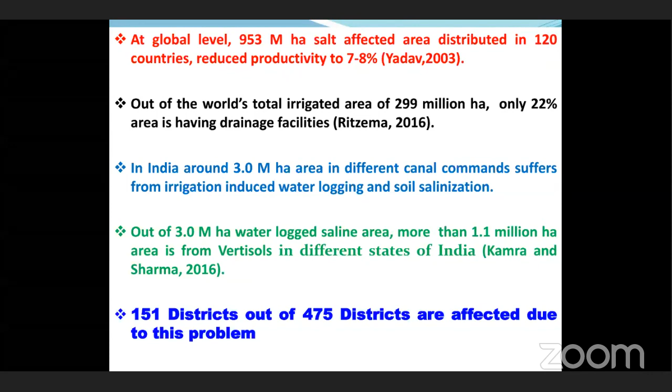Still now only 22% area is under drainage at the global level. In India, 6.73 million hectare area is salt affected, and 3 million hectare area is waterlogged in different canal commands. Out of 3 million hectare area, 1.1 million hectare area is from vertisols in different states of India. In India, 151 districts out of 475 districts are affected due to this problem.

This problem was spread all over Maharashtra, wherever irrigation is there, either canal or lift irrigation. It is spreading especially in different river command areas - Krishna command area, Godavari command area, Varna command area, Panchaganga command area, and different rivers flowing in Maharashtra. In these command areas, the problem of salinity and sodicity is increasing day by day.

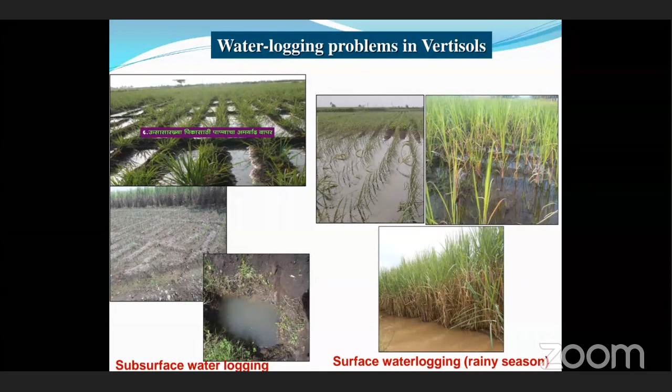If this water table remains for a prolonged period, salinity, sodicity, and waterlogging are the next problems. First, soil starts waterlogging, and salts from the water add into the soil, and due to evaporation they come to the surface, and the soil becomes saline. Then saline-sodic, which is a middle type, and then the third type is sodic soil.

In sodic soil, we cannot grow anything. You are watching in the picture that there is nothing - even grass, even weeds cannot grow there. Water cannot infiltrate in that soil; the soil is totally compacted.

That's why drainage is important for draining excess water as well as leaching the salts. The problem is rising, and we are all aware of these problems - salinity, waterlogging, and sodicity problems are rising in different states of India.

To combat these twin problems of waterlogging and salinity, there are different options: drainage method, use of amendments, selection of salt tolerant and waterlogging tolerant crops, and management practices. Management practices are also very important.

If you install only drainage and don't do anything else - like plowing, cultivation of green manuring crops, or use of salt tolerant crops - then the soil will not improve. We have observed this case in Maharashtra.

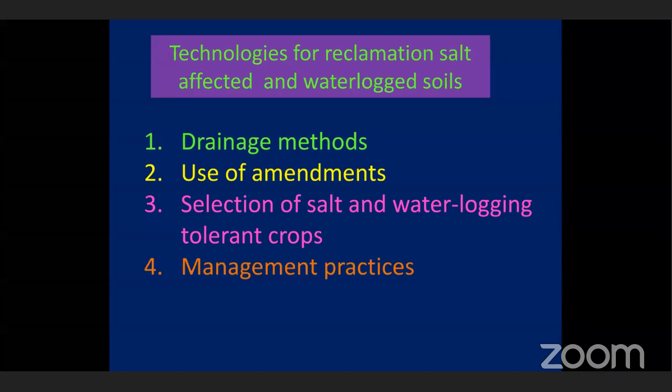Now I am coming to success stories. Friends, we know that due to salinity, sodicity, and waterlogging problems, sugarcane productivity especially is declining day by day. In the 1970s, sugarcane productivity in Maharashtra was near about 150 ton per hectare, and now it is 50 to 60 ton per hectare due to salinity and waterlogging. This situation is similar in Gujarat, even in Karnataka and Andhra Pradesh.

To increase productivity, whether the problem is saline, waterlogged, or less productive, appropriate drainage measures are required to enhance water productivity in salt-affected and waterlogged areas.

We know that drainage is very important for improvement of the soil, but spacing and depth are also very important. Yesterday we saw that excess drainage of water is one problem, and second is leaching of nitrates, meaning nutrients are also very important. For that, we have to choose the optimum drain spacing and optimum drain depth.

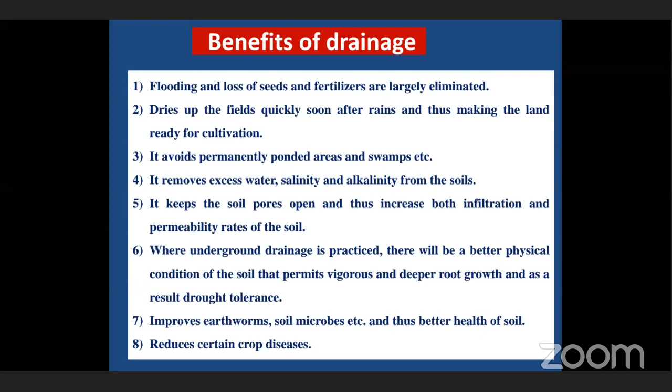It also improves biological properties of soil because aerobic bacteria work very fast and well under drainage conditions, since proper aeration and congenial conditions occur after SSD. It also reduces certain crop diseases because we are reducing surface waterlogging, which creates disease and pest problems on crops, and we minimize that by the use of drainage.

Now I am coming to the actual part of today's lecture. My experiences - I'm starting from the history of drainage in Maharashtra.

First, in 1930-34, this story had happened in the Manjari drainage scheme. This was in Khadakwasla in Pune district. Its location is the Khadakwasla irrigation project, Pune, distributaries number 5 and 6 of the Mutha Right Canal. In that command area, shallow soils are 30-36%, medium soils are 43%, and deep soils are 21%. Irrigation had started there in 1880.

Just after 40 years, waterlogging was seen near the One Nala in 1920. We know that irrigated crops give 2 to 3 times more yield compared to rain-fed crops, and farmers really got very good results during the start of irrigation. But over the course of time, salinity and waterlogging developed in the soil, and crop productivity reduced. Around 1920, waterlogging was observed in the Khadakwasla irrigation project, and some portion of the damaged land was also seen to be affected by salt.

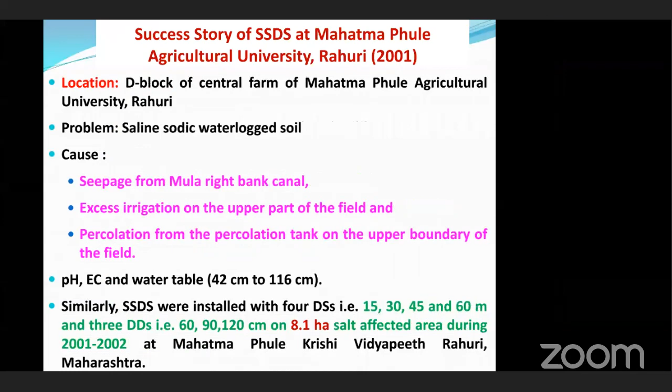...the EC (electrical conductivity of the saturation paste extract), sodium adsorption ratio, calcium, magnesium, sodium, potassium, chloride, carbonate, bicarbonate, and sulfate of the saline sodic waterlogged soil were found better improved.

These chemical properties of soil improved best under a drain spacing of 15 meters and drain depth of 120 centimeters—so lesser spacing and higher depth gave better leaching of the different chemicals present in the soil.

The EC and SAR were recorded below 4 deciSiemens per meter and 15 respectively within 2 years of SSDS with 15-meter drain spacing and drain depth of 1.2 meters.

In terms of order of preference for better performance: first is 15-meter spacing, then 30-meter, 45-meter, and 60-meter, all with 120 centimeter drain depth.

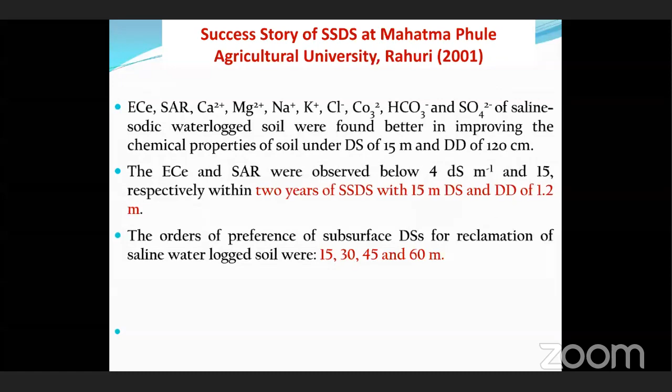This is a very good success story from Mahatma Phule Agriculture University at the central campus.

Then there is another success story on SSDS at Vasantrao Naik Marathwada Krishi Vidyapeeth, Parbhani, where they installed a subsurface drainage system in 1994.

There was a coordinated research project on water management at Marathwada Agriculture University, Parbhani, on deep black soils having clay content more than 52%.

As far as drainage material is concerned, they found that clay tile required a minimum drain-out period compared to PVC corrugated pipe and rigid PVC perforated pipes. They tested three pipe materials: clay tile, perforated corrugated PVC pipe, and rigid PVC perforated pipe.

Among these, they found clay tile required the minimum drain-out period compared to the PVC corrugated perforated pipe and the PVC rigid perforated pipe.

They also studied filter materials, and found that the performance of sand and gravel envelope was better than textile envelope. The field experiment was conducted for soybean crop followed by wheat crop in the Rabi season.

Actually, though sand and gravel perform very well, nowadays these materials are not available in large quantity, and even the cost of these sands is high compared to geotextile filters.

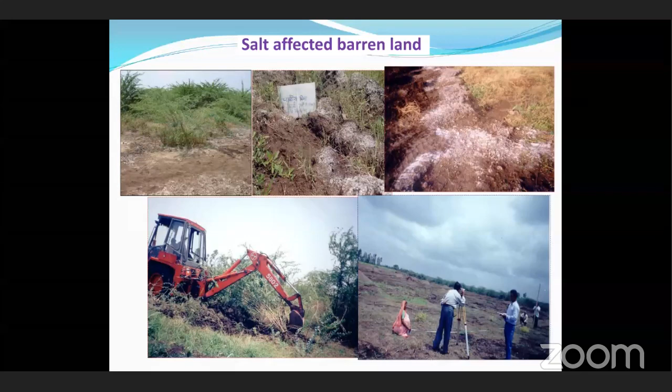We have studied the properties. pH found before drainage was 8.13 to 8.52, EC 2.22 to 17.82 deciSiemens per meter, and ESP 7.04 to 17.50.

Then hydraulic conductivity, which is very important for design purposes, was also observed very less: 0.0236 to 0.0579 meter per day. And the water table observed was 0.265 meter from the soil surface.

The water table was within 1 foot. If the water table is within 1 foot, we cannot grow even sugarcane and other crops.

That's why that land was barren for the last 20 years. We designed the drainage system, and considering the hydraulic conductivity, depth of drain, and the sugarcane crop, the drain spacing we kept was 25 meters.

Average drain depth was 1.25 meter.

Second, it helps us flush the system. And third, we can check whether our system is working or not.

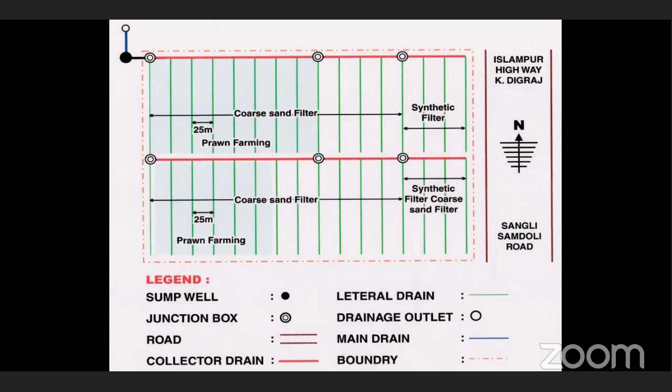So this layout was used at our ARS Digraj farm. After designing and preparing the layout, we purchased different materials.

We used SSD with geotextile filter, then coarse sand. We actually used three filters at that site: geotextile plus coarse sand, and a third one of coarse sand.

We evaluated the perforated pipe drainage system using these three filters, and I will explain the results.

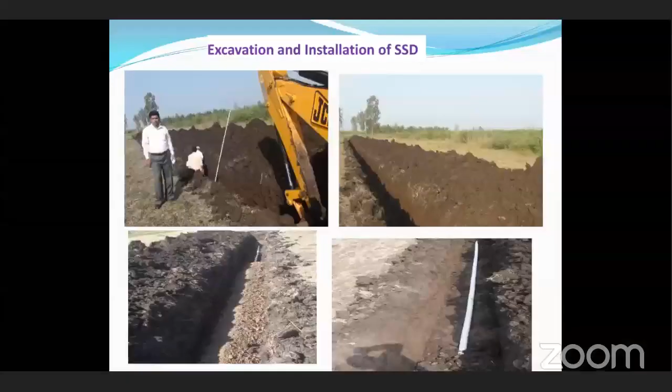We excavated and installed the drainage system as per the layout. While installing the drainage system, at that time the outlet was not open.

The outlet was not available at our site. This was the case in most situations where outlets were not present, and in that situation there is a need to construct a sump well.

This helps store the drainage water, and with the help of a pump we can pump this drain water quantity and drain it into the open drain.

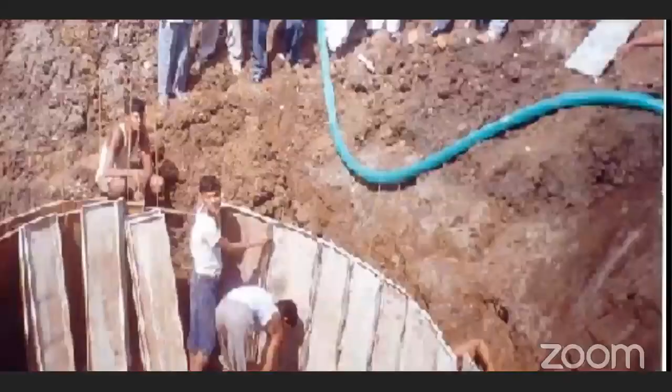That was one big drain, and now we have converted this pumping drainage system into a gravity drainage system.

We chose gravity drainage because it requires less cost, and its maintenance is also less.

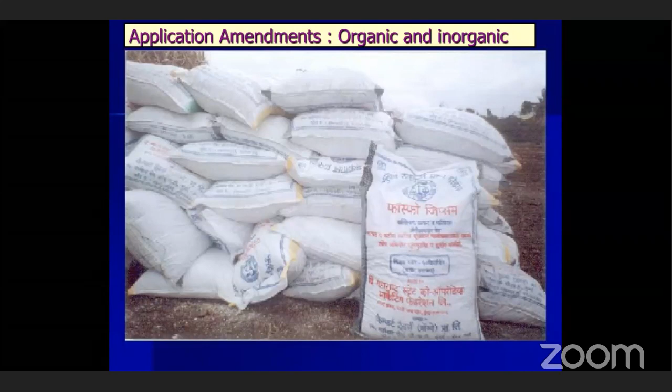The field site is saline sodic, and in some places sodicity is also very high, so we used gypsum as a chemical amendment. These are the bags showing how we applied gypsum, because in Maharashtra, Karnataka, and Gujarat, there is a situation of sodicity as well as waterlogging.

Waterlogging occurs where the water table level is again within 1.5 meters in most situations. So only gypsum application will not work; in that case we use a dual method.

After installation of the drainage, we have to use different chemical amendments.

We used gypsum as a chemical amendment for leaching, especially sodium, to minimize the sodicity of the soil. After applying gypsum, we took a green manuring crop, Sesbania rostrata.

Later we plowed that land and planted sugarcane as a reclamative crop, because sugarcane, as recommended by Mahatma Phule Krishi Vidyapith, is suitable.

We used variety Co M 0265, a salt-tolerant variety, which we planted just after installation of the drainage system.

Why did we plant sugarcane first? Because it requires high water throughout the year, and with the help of irrigation we can leach the salts while also growing a good crop, since this is a salt-tolerant and waterlogging-tolerant crop.

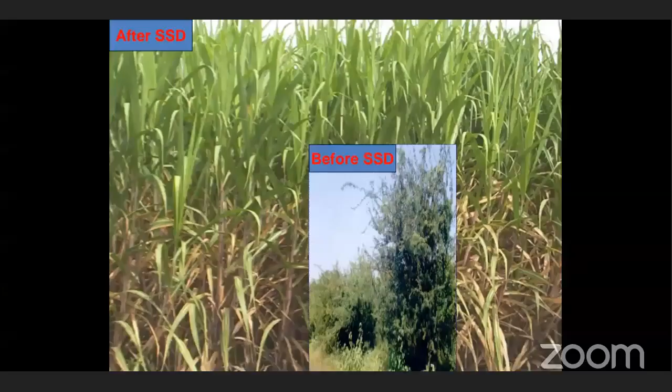This is before drainage and after the sugarcane crop. After drainage, sugarcane crop was there. So we have studied the salt leaching, how salts leached through the drainage system, year wise.

Within 4 years, pH was reduced in SSD with synthetic filter; total quantity decrease was 0.62. Initial pH was 8.47, and after 4 years it was 7.85. In SSD with coarse sand filter, it was 8.40 initial, and after 4 years, 7.90. A very small drop in pH is recorded because the inherent buffering capacity of soil is very high in the case of clay soil. That's why the reduction is very less in pH of the soil.

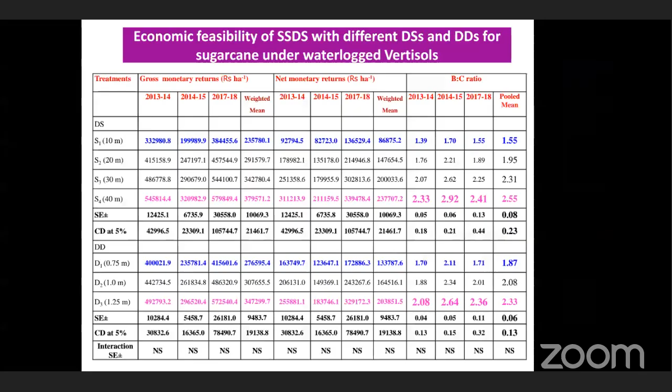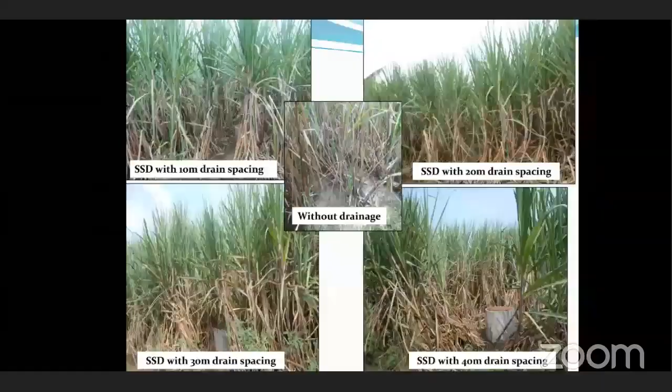Just wait, I'm trying to join again. What has happened? Just wait, I request all participants please stay here. What has happened, I don't know. Why am I...

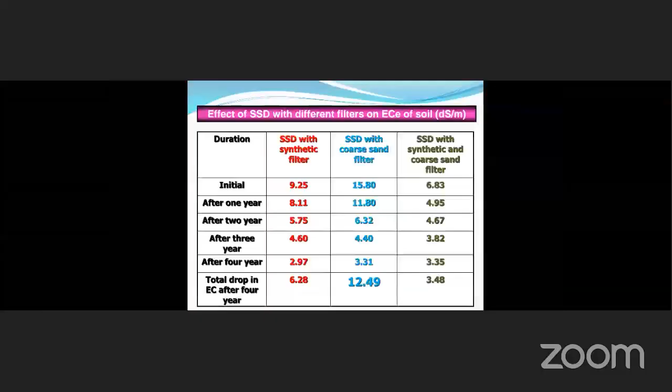Effect of SSD with different filters on ECE of soil. Am I audible, Dalvi sir? Yes sir, you are audible, please continue. Okay, I have faced a few problems here. So this table indicates how different SSD with different filters perform in reduction of the ECE of the soil.

In SSD with synthetic filter, 9.25 was initial ECE, and after 4 years it was 2.97. In case of SSD with coarse sand filter, 15.80 EC was there at initial, before drainage, and after 4 years of drainage, 3.31 was there. Then in case of both filters, 6.83 was initial, and after 4 years, 3.35 EC was recorded under the drainage system with synthetic plus coarse sand filter.

Look at the total drop in EC after 4 years. This was highest in SSD with coarse sand filter, as recommended by VNMKV Parbhani. They have also recommended coarse sand filter, and similar results we have recorded at our site also, because this coarse sand filter performs very well in dropping the total ECE of the soil.

Next is ESP, exchangeable sodium percentage. This is actually the indicator of the sodicity parameter, as the site is saline sodic. So we have used gypsum at a rate of 5 ton per hectare; half we used in the first year, and the remaining half we used after 2 years.

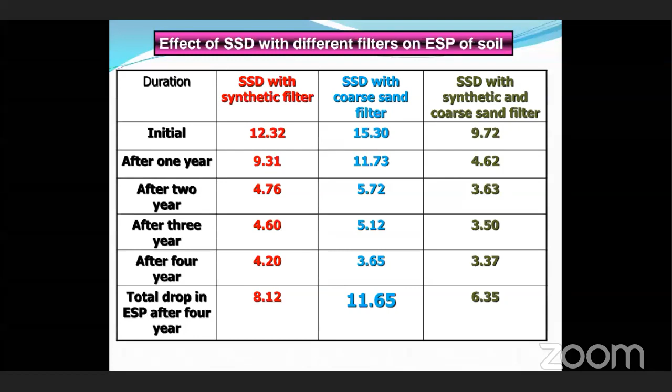After using this gypsum and SSD, the sodicity was also reduced. A higher reduction was observed in SSD with coarse sand filter, followed by synthetic filter and synthetic plus coarse sand filter.

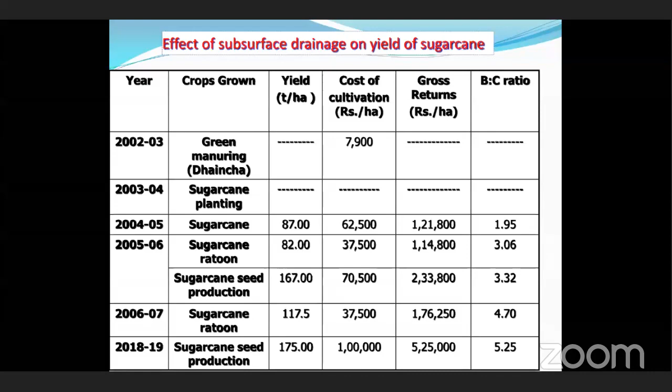And in 2006-7, this yield productivity increased up to 117.5, and now in '18-19 the productivity of sugarcane is 175 ton per hectare in this salt affected and barren land, and this was possible only due to use of the subsurface drainage system. Look at the BC ratio - this indicates that this system is highly economical for farmers.

This is the recommendation we have given for the farming community of Maharashtra, even all over India, wherever the problem of salinity, sodicity, and waterlogging is there, and medium to deep black soil is there: the subsurface drainage system with 1.25-meter depth and lateral spacing of 25 meters, with integrated use of gypsum - 50% of gypsum requirement at the start, and after 2 years we apply the remaining 50% gypsum, and green manuring, that is sesbania, called dhaincha in Marathi.

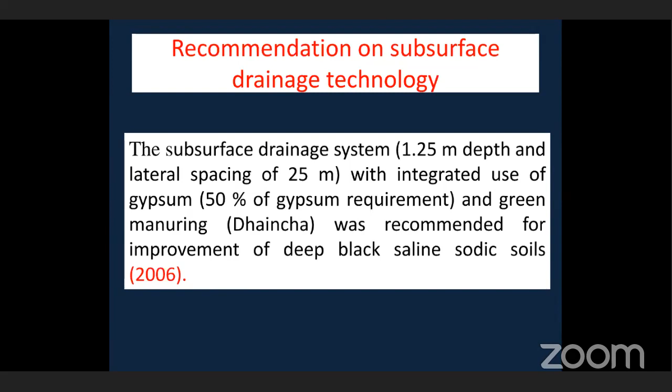This is important - only the drainage system can't work alone. There is need to use gypsum, and green manuring crops are required for all soils. Yeah, even good soil, even saline, sodic, waterlogged - all soil. This is required for all the soil. So this is a package for development and improvement of salt affected soil.

Now coming to the next success story - large scale projects in Sangli district. After getting very good success at our farm, two projects came at Sangli: 1100 hectare in Dudgaon, that is Reclaim One project, and 1065 hectare in village Kasbe Digraj, that is Reclaim Two project. The finance structure in that project was 60% finance from Ministry of Rural Development India, 20% finance from Government of Maharashtra, and 20% contribution from the beneficiary farmer.

In that project, they observed that the pH decreased from 8.11 to 7.63, ECE from 8.11 to 4.60 decisiemens per meter, and ESP also decreased from 9.31 to 4.60. Now farmers are taking very good crops after implementation of this project - soybean, sugarcane, wheat, turmeric, even groundnut, even vegetables, they are growing all crops actually, because waterlogging, salinity, and sodicity are all reduced. This is the very good impact of this large scale demonstration project in Sangli district.

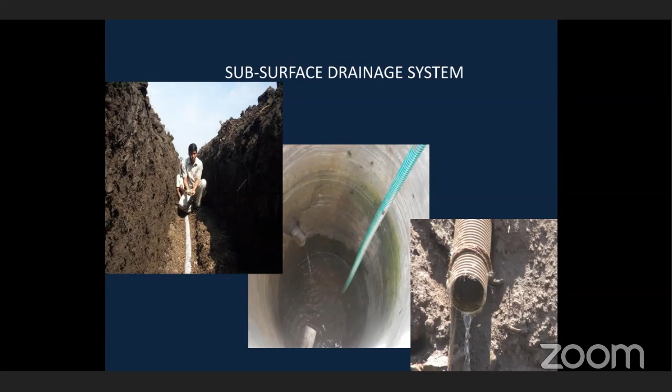This is very important, from the farmers' point of view, looking at the impact of the drainage system. The first three farmers' soils were badly damaged due to salinity, waterlogging, and sodicity. ARS Digraj is working on these particular aspects - agriculture engineering section, especially irrigation and drainage engineering, one department is here. Even soil science and agricultural chemistry department is working here, and agronomy department. We combinedly work very hard, and we are giving the technologies to develop such salt affected and waterlogged soil.

From 1996, we have installed this drainage system on different farmers' fields. These are the results from different farmers' fields. First three farmers' fields - see the results. Before drainage it was 40 ton per hectare for Sheshal Sheshapa Dudgave.

This system was installed, I think, 20 years back, but still it is working very nicely. That farmer still comes to our station and tells us that your system has helped me a lot, because 40 ton has risen up to 157 ton per hectare in his field.

Second farmer, Balasaheb Devgonda Patil, is from Mauja Digraj, Sangli. Before drainage, sugarcane yield was 30 ton, and now he is harvesting 166 ton per hectare. See the increase in the gap. Why am I recommending this technology, subsurface drainage technology by perforated pipe, as compared to other methods - surface drainage, even bio drainage method, and even mole drainage method? This system is modern and accepted worldwide because its impact is very visible, very significantly different than other methods.

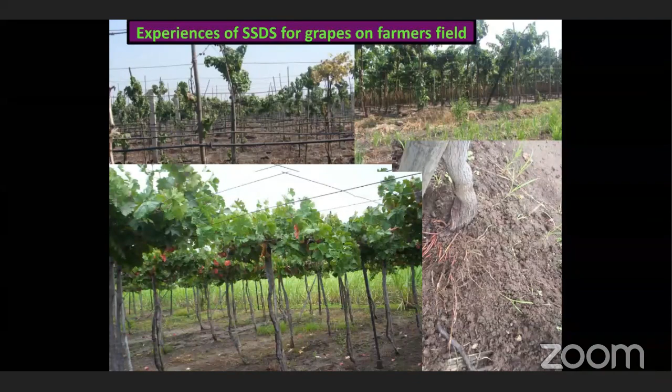This is the before drainage situation, and this is after drainage. I will show the table also, but just see the pics before and after drainage. See the salts in the grape garden - but with the help of the drainage system, they grow good grapes, because leaching of salts throughout the year is possible with the drainage system, and they are growing very good grapes now.

This is before drainage - we cleaned the field and removed prosopis from one farmer's field. Just after installation of the drainage system, we grew grapes in that field. See the difference in how the grape garden is grown healthy - see the crop color and growth. Before drainage, only prosopis was there.

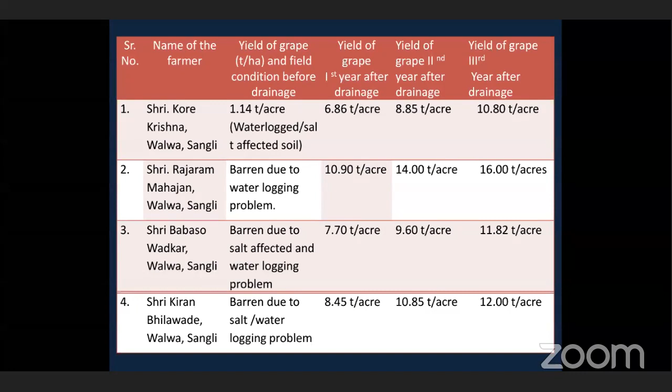Even in Babaso Wadkar's case, his yield was 7.70 ton per acre, and now he is harvesting 11.82 ton per acre. Kiran Bhilawade is the fourth farmer. His yield after drainage was 8.45 ton per acre, and now he is harvesting 12 ton per acre. So my slide is self explanatory, showing how SSD is helpful for crop yield and increase in productivity.

Now I will cover the next story. This is one of my stories. I have done my PhD on this topic, so I am sharing this story too, because I installed a drainage system with different combinations of drain spacing and drain depth in waterlogged vertisols on a farmer's field. I covered near about 3 acres area under this experimental field.

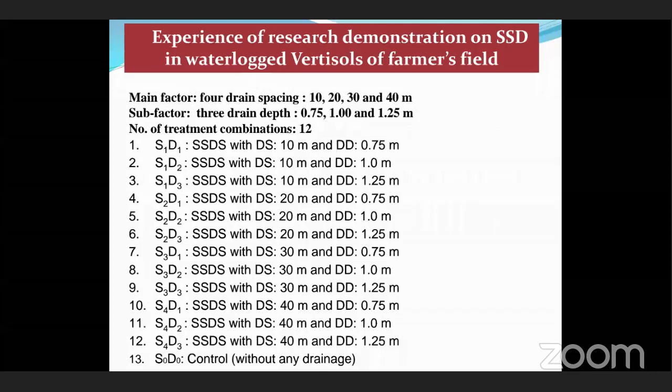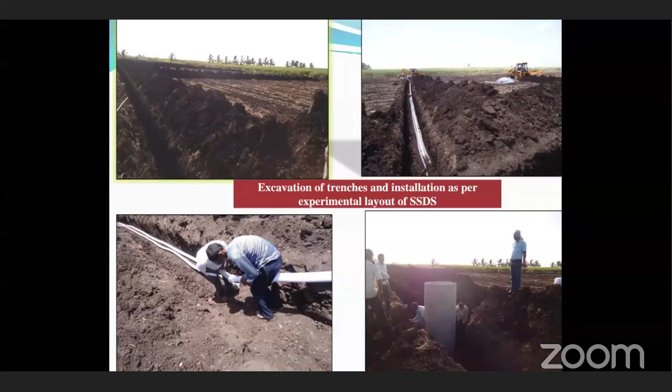As per the layout, I excavated the soil and installed the drainage system. These are a few pictures of those joinings and different pictures of that site. This is the inspection chamber.

From that, we can collect water from three depths. If suppose 10 meter spacing is there, we can collect drain water for analysis, or to calculate the drainage coefficient, from three depths: 0.75, 1, and 1.25 meter. Likewise, such chambers are there for 20 meter, 30 meter, and 40 meter also, to collect drain water from different depths: 1.25, 1, and 0.75 meter drain depth.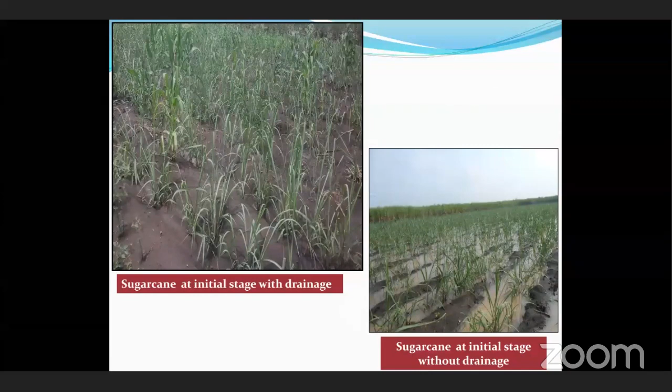This is the condition of sugarcane at the initial stage, with drainage and without drainage. This is a control plot, and this is the under-drain plot. Here all the water is completely drained with the help of drainage, and here waterlogging is there.

This is 3 days after heavy rainfall. Here, the whole surface water was drained out of the field, whereas in the control plot, waterlogging was there. See the sugarcane growth also.

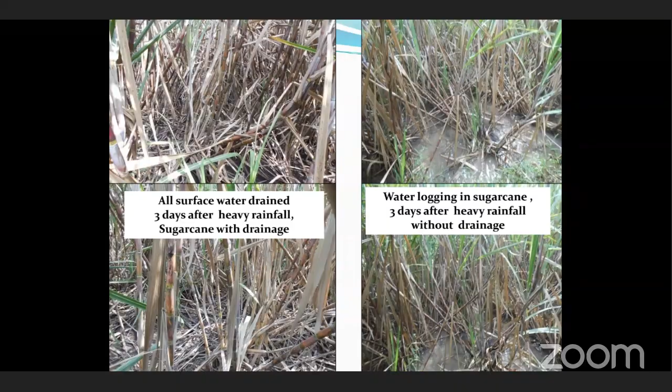I will show a lot of pictures in this study. At that time, Dr. Gorantiwar, who is an expert in irrigation and drainage and is now head of the agriculture engineering department, was guiding all of us, along with my guide Dr. Dehwalkar sir, and the AD at that time, Dr. Turbatmath. All of them visited and commented very positively on my experimental area and the growth shown in the pictures.

This is very interesting. You have never seen such results. Suppose we take 10 meter drain spacing, and depths are different: 0.75, 1, and 1.25 meter. If you keep the same spacing, and as the depth goes deeper, sugarcane growth is also increasing as the depth increases.

Why were these results recorded? Because sugarcane is a deep rooted crop, and that's why deeper drains provided very good conditions for root growth of that crop, giving congenial conditions for nutrient availability, water availability, and air availability, as well as providing congenial conditions for root growth.

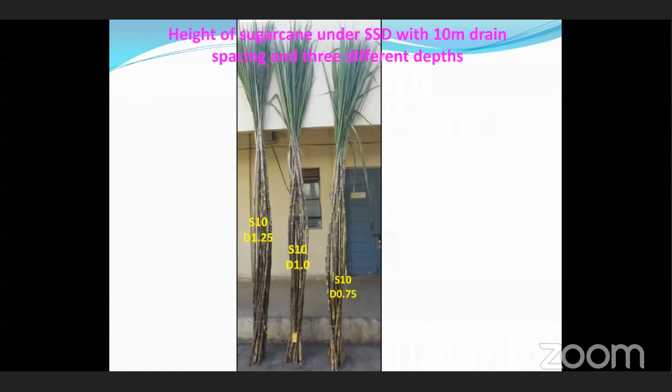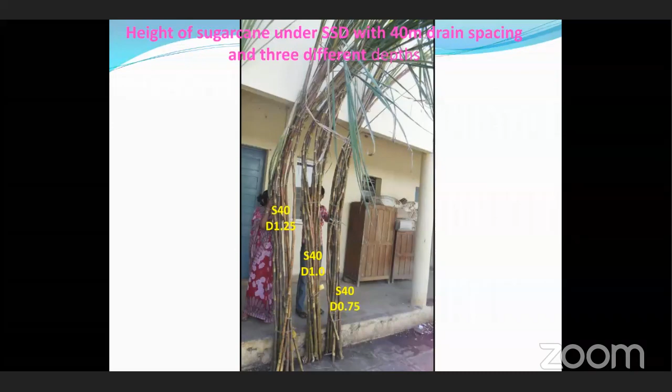Similar results in case of 30-meter spacing with different depths. And in 40-meter also, see the difference: at 0.75, 1 meter, and 1.25 meter, as you are looking in the slide, the height is higher than the other two drain depths. This is actually for different drain spacing with the same depth.

1 meter drain depth is constant here, but spacing is different. As the spacing increases, I have recorded higher yield, from 10 to 40 meter drain spacing. As the spacing increases, sugarcane height also increases. Why it increased, I will explain later.

This is about 10 meter without drainage, then 10, 20, 30, and 40. Look at this photo. In without drainage, sugarcane is not grown straight because roots were not grown deeper. That's why it cannot withstand its weight, and it falls down on the ground, and again grows up.

Likewise, that's why the sugarcane is not straight in the without-drainage system. Whereas in the drainage system, sugarcane growth is grown straight in 10 meter, 20 meter, 30 meter, and 40 meter. As the spacing increases and depth is constant, I have recorded the tallest sugarcane crop in 40-meter spacing and 1 meter drain depth.

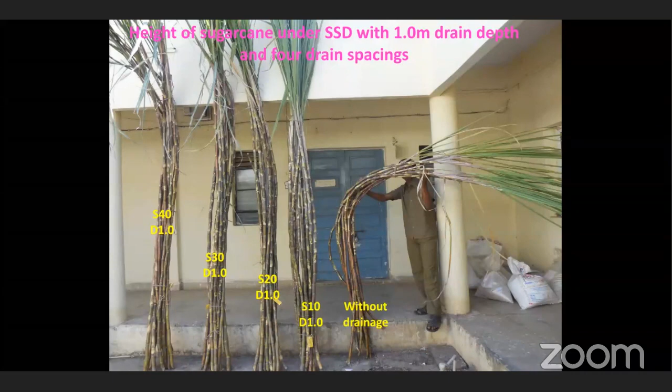This should be location specific, location specific in their water management conditions. What water management situation is there at your own site. Accordingly, the results will change, and we have to change the drainage system as per our local conditions, local problems, local situations. Because of this, I have recorded these type of results.

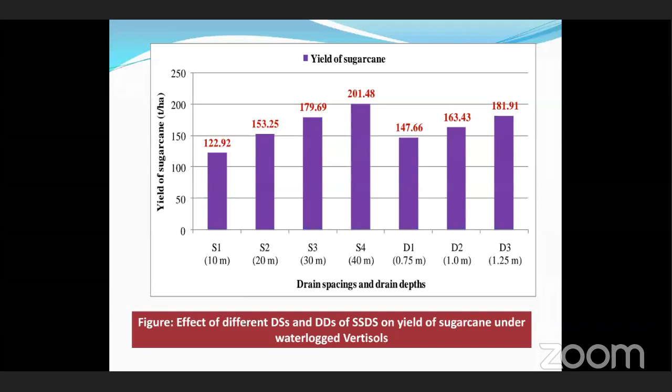So these two we can use for the waterlogged vertisols, because problems are different. We cannot use the same spacing. Waterlogging is another problem. Once you install the drainage system, it will work quickly, removing water, and we can get very quick results.

If sodicity and salinity is there, then we need 3 to 4 years to leach out these salts, and we can get good results. We can wait for 3 to 4 years, but the water logging problem we can minimize within a week or within 15 days after installation of the drainage system, because it will work just after installation of the system, as excess water will seep and meet the drains, and we can easily remove that water out of the field.

In case of yield dynamics of sugarcane, see the weight of a single millable cane. I have recorded number of millable canes per clump, girth of cane. The first two parameters were recorded highest, as these are very important yield-contributing characters. So S4D3, that is 40 meter spacing and 1.25 meter depth, has recorded very good yield as compared to the other drain spacings and depths.

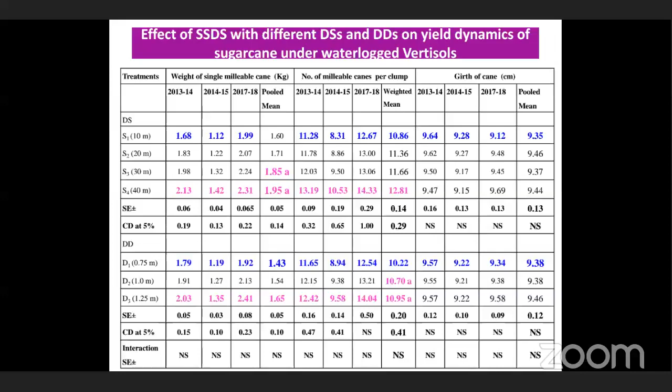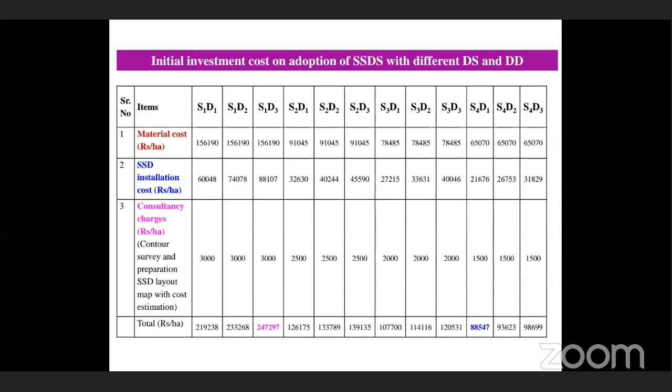But you should observe the site. This is a logged site, and there are different constraints at that site. By considering those constraints, we have to change the drainage system.

Gross monetary return, net monetary return, and BC ratio were all recorded highest, as the yield was significantly highest in 40 meter drain spacing. Its cost is also less, and that's why the pooled mean of BC ratio was also higher as compared to other drain spacings, that is 2.55 BC ratio was recorded in S4, and 1.55 in 10 meter drain spacing.

In case of drain depth, D3 at 1.25 meter recorded significantly the highest pooled mean BC ratio.

Yeah, these are the possible reasons. The one thing is drainage of excess water. Yesterday Dr. Koregaudar sir nicely explained the need of the control drainage system, because of spacing.

I have kept spacing of 10, 20, 30, and 40 meter, and at our site, there is a cooperative lift irrigation area. A lot of farmers are members of that cooperative irrigation scheme.

The irrigation interval is more than 25 to 30 days, isn't it? Like canal water, they are getting water every 25 to 30 days, but by using closer drain spacing, they are draining excess water just after 3 days, and it will provide moisture to the crop only up to 15 days. Later on, the crop faces the problem of water scarcity or moisture deficit condition in the drainage system with 10-meter and 20-meter spacing.

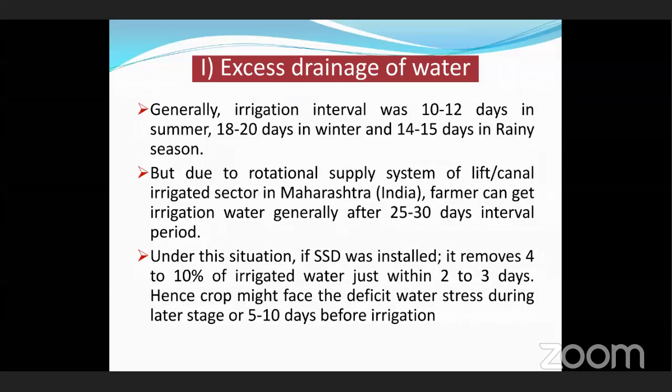These are my results at the site. Then the second cause is water logging tolerance of sugarcane.

Sugarcane is a highly water-logged tolerant crop. Even if you go for higher spacing, it will tolerate water up to 7 days, and yield will not reduce significantly under that situation. Reduction is less up to 7 days, and that's why I recorded higher yield under 40-meter and 30-meter drain spacing.

Different scientists have also recorded water logging tolerance of sugarcane. Glaz, Morris, and associated scientists have all recorded up to 14 days of shallow water standing in sugarcane. One more example is that, as per FAO guidelines, the yield response factor of sugarcane is greater than 1.2.

This means it is very sensitive to water scarcity, isn't it? Due to closer drain spacing and high irrigation interval situations, it faces moisture deficit conditions, and due to these situations, sugarcane yield was recorded less as compared to 30 and 40-meter drain spacing.

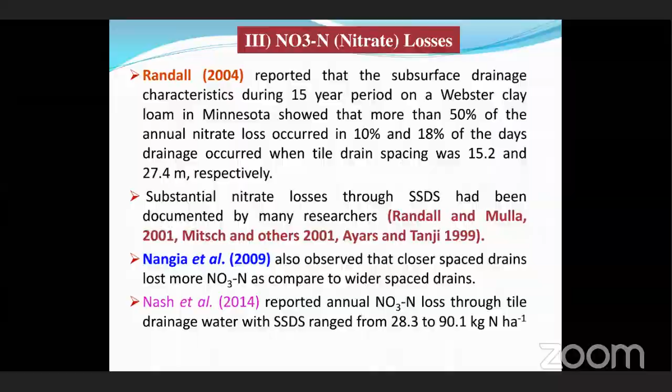This review I found, and I was very happy when this review was found, because I have also recorded the highest yield in 40-meter drain spacing, and he recorded similar results. The possible reasons I have explained are excess drainage of water, excess losses of nutrients, and water deficit conditions. These are the possible reasons.

See the Indian subsurface drainage design guidelines, Tiwari and Goel in 2017, recommended that for this vertisol soil, 30 to 50-meter drain spacing should be there for fine textured soil, and drain depth should be greater than 1.25 or near about 1.2 meters, and drainage coefficient of 2 per day for semi-arid regions. At my site, I have recorded 2.18 per day. This is near about that recommendation. And again, spacing was 40 meters.

So these are actually supporting my outputs. With the help of data, I have recommended this spacing. The subsurface drainage system with 40-meter drain spacing between two perforated corrugated pipes and 1.25-meter drain depth is recommended for higher economic production of sugarcane, improved soil health, and optimum...

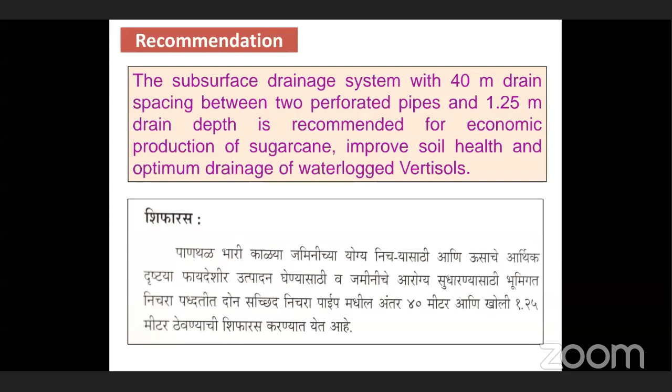This word 'optimum' is very important - optimum drainage of waterlogged vertisols. In that condition, we never exceed the drain, and even not very slow drain. So optimum, as recommended in our Indian subsurface design guidelines, 2 drainage coefficient is optimum for drainage of fine textured soils in semi-arid regions. The same results I have recorded.

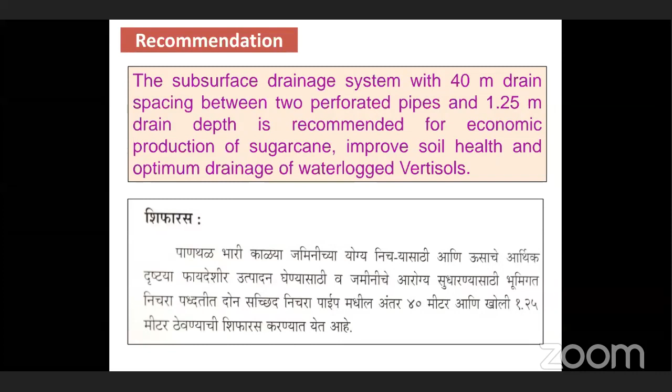My second objective was also important for drainage designers and policy makers. Friends, we know that design equations are many - there are steady state equations, unsteady state equations, and a lot of different equations, but which should we use? Designers are always in dilemma about which equation to use.

So for that I have evaluated 10 equations. Among 10 equations, three are steady state equations. Among different steady state equations, Hooghoudt - this is the most popular equation that I have selected for evaluation. Donnan's equation, Hammad's equation - these three equations I have chosen for my study.

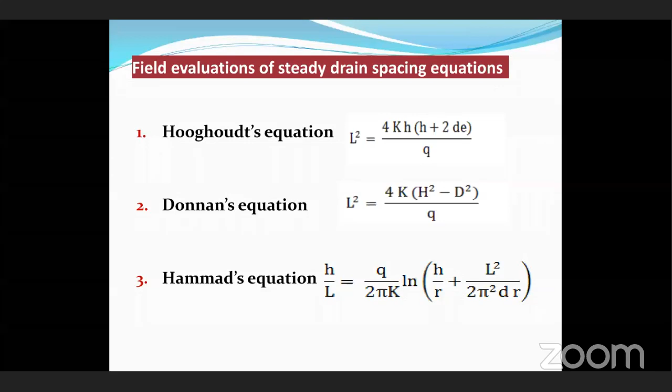Then unsteady state - these are very important formulas. Unsteady state, because at our site in India, the practical situation is unsteady state condition. So we have to use these formulas actually. But I have recorded different results, which I will explain here. So these are seven unsteady state equations: the modified Glover equation, Guyon's equation, and other equations. These seven unsteady equations and three steady equations I have chosen for evaluation.

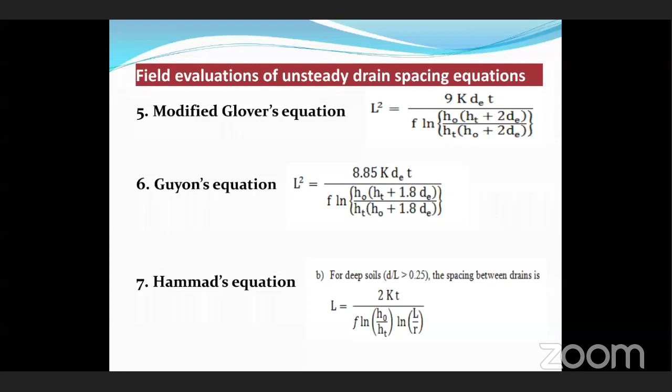Different statistical parameters I have used to evaluate these equations: percent error, R square, standard error, average deviation, and chi-square test. Different tests I have used to select the most appropriate equation for drainage design.

Only two parameters are required: drain discharge and hydraulic conductivity. With the use of these parameters, we can design the drainage system by using simply the Hooghoudt's equation.

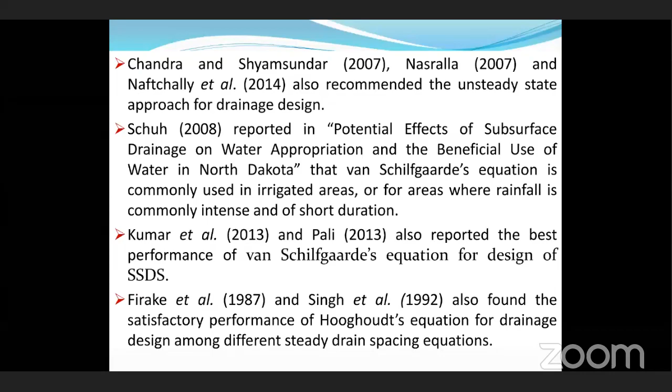Even at MPKV, Dr. Firake has also recommended the Hooghoudt's equation among the different steady drain equations. So this is very important for designers, especially for engineers, to know which equation should be used for the design. So this equation I also recommend for design of the drainage system.

The Van Schilfgaarde, that is the unsteady equation, is recommended for optimal design of subsurface drainage systems, for deciding spacing and depth of drain pipes under waterlogged, heterogeneous, and deep impervious layered Vertisols of Maharashtra. At my site, the Vertisol soil is layered and heterogeneous, with very little homogeneity. That's why this equation performed very well and was recommended for drainage designers in Vertisols of Maharashtra. So we can use this equation for drainage design.

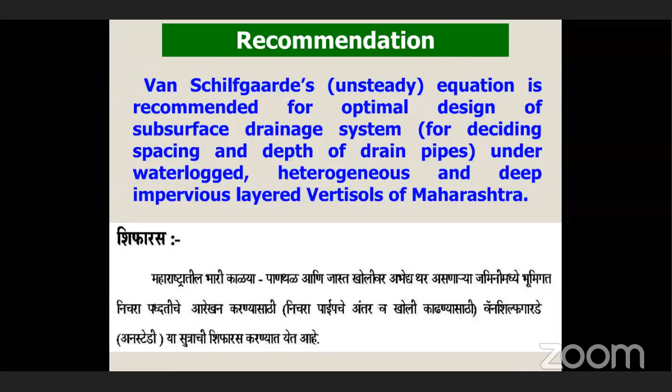Now, this is the success story of subsurface drainage at Shirol. I will not explain this story because there was a separate lecture on this particular story.

But I want to say that this Shirol project is very unique in India because we have eliminated the disadvantages of the open drainage system. Previously installed drainage systems used an open drain as the main drain, which facilitated draining the water from the drainage system.

But in this system at Shirol, across different sites and villages, in more than 1,000 acre area, we have used a telescopic design, right from river to farm. Only a pipe system is there; nowhere have we used an open drainage system.

This is the beauty of this system, because for an open main drain, the excavation width should be 3 meters. So that much land would be wasted, and in irrigated areas fragmentation was more, with each farmer having only 20 or 30 area of farmland, so they are not eager to allow their land for this main drain. That's why we chose this option.

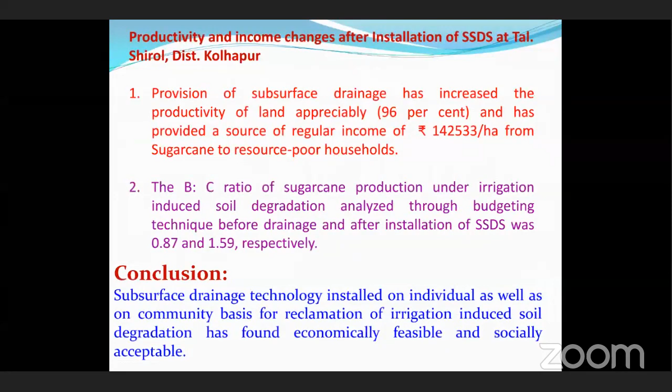The results I will not explain, because Dr. Haganna will explain all these results. Our university, Mahatma Phule Krishi Vidyapith, is continuously receiving funds from RKVY, Rashtriya Krishi Vikas Yojana, since 2011, and till now we are receiving funds. From this fund, I installed a drainage system under RKVY and studied the results. Through RKVY I have covered 100 acres area under subsurface drainage system, and see the impact.

Farmers are growing very good crops of sugarcane, chickpea, and other crops because of the drainage system. These are a few pictures of that site after installation of the drainage system.

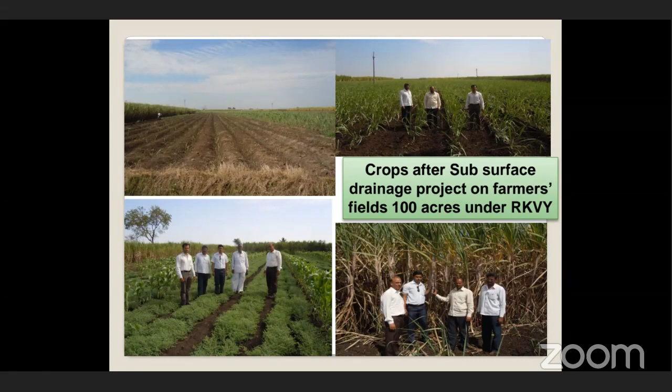Our director of research and director of extension also visit continuously these SSD plots to evaluate the system and get feedback. Farmers are very happy with the subsurface drainage system. We installed it on just 50 acres in that village, but now the area has risen to more than 500 acres. This was the impact of this demonstration project - seeing is believing, really. Farmers are visiting those demonstration plots, seeing the real impact of the drainage system, and now they are willing to install the subsurface drainage system on their own farm at their own cost. But if the government gives some help, that will again be very good for the farmers.

Due to that, I worked on low cost mole drainage technology. Why has this technology not increased in India? I found that the reason behind this is availability of the mole plow. This technology is still being used in UK, Australia, and New Zealand - these types of hitching attachments are there. They use this technology in vertisol soil, black soil, where clay content is higher than 30%. But I thought, why is this technology not being used in India? I found that the plows were not available, and systematic research work was not carried out on this technology. That's why we tried to manufacture and design this mole plow - the front part is the bullet.

See in the figure, the bullet is there, and below that the expander is there, and a vertical plate, that is the shank, and the 3-point linkage frame is there. So these are the parts of the mole plow. The diameter of the shank bullet is 75 mm, and the expander is 10 mm more than the bullet, that means 85 mm. Why? Because the bullet part is the front part of the mole plow, and it will make the rough holes during the molding process, and the expander part will come after that. Whatever rough holes were prepared due to the bullet, it will become very smooth and compact while moving the expander through the rough holes. So this is important.

And what is the use of the shank? It will make the vertical leg slot from the surface up to the pipeless hole. This will help transfer surface water from the surface to the mole, and drain out the excess water out of the field. So this is a simple plow.

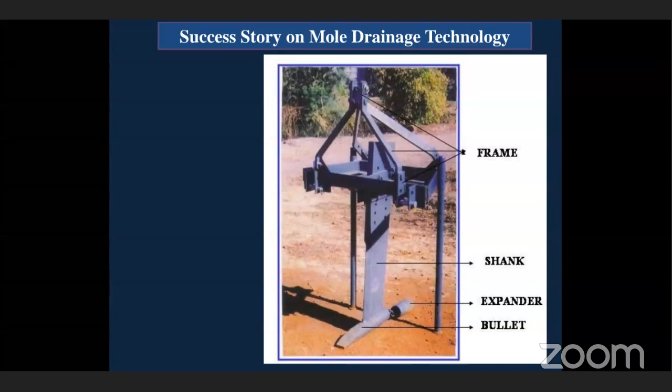We require only 30 to 35,000 rupees for this small plow. In foreign countries like Australia, UK, New Zealand, the cost of this moling system is more than 5 lakh, 10 lakh. So looking to our farmers, our poor, small and marginal farmers, we developed this plow.

Many farmers, even in other states, are adopting this. I'm happy to say that this technology is also extending in Madhya Pradesh under the guidance of KVR Rao sir, and Dr. Dhakad is also working on this technology. Only these two states are working on this technology currently. In Bhopal, and even at Sangli, Kolhapur, and Satara, this technology is performing very well.

Currently, I have found a review that Tuohy et al. reported that in fine texture soil, low permeable soil profiles, moles can be installed to supplement an underlying tile drain system. We can use it combined with subsurface drainage with perforated pipes.

Now I have installed such systems, subsurface drainage, and in between I have used moles. Really, it is helpful to increase the drain discharge through that drainage system. I have used 40-meter drain spacing, but this system has helped me to increase the discharge of the drainage system even with higher spacing. So I am trying to reduce the cost of the subsurface drainage system also.

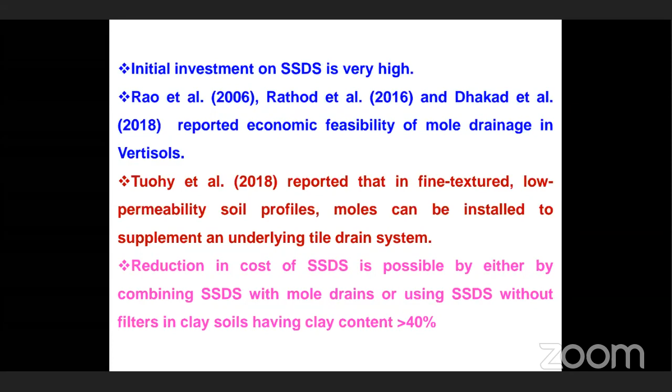Now, I already explained where mole drains will be most effective. Waterlogging is a common occurrence in high rainfall or irrigated areas, and in that area this will work very well. Surface gradients should be less than 2%. Soils with clay content more than 30% are required for the successful use of the mole drainage technology. Clay with low sodicity is also required for use of this technology.

And this is important: moisture content should also be optimum. The soil should be at the plastic limit. When you take soil at the molding depth, if you are able to form a ribbon without cracks, form a ball without cracks, then that condition will be most appropriate for the molding operation. And the safe discharge point is very important, because if a safe discharge point is not there, water will go back into the mole drains and they will collapse. That's why a safe discharge point is required, and for that we need re-excavation of the different available open drainage systems.

During my last lecture, few participants asked what should be the mole drain spacing. Isn't it really a problem? What should be the mole spacing? Because if you use less spacing, it will drain more. And if you use higher spacing, then slow drainage is the problem. So always an optimum spacing should be there.

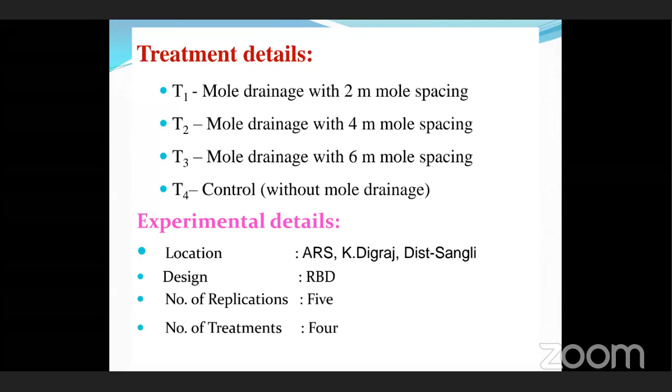That's why we conducted continuous 3-year trials on optimization of mole drain spacing. We included 2, 4, 6 meter and control treatments. This was conducted in RBD design with 5 replications, across 3 crops continuously: groundnut in Kharif, soybean, groundnut in summer, soybean in Kharif, and chickpea in Rabi. I purposefully selected these crops because groundnut and chickpea are sensitive to waterlogging, and I wanted to know the results of this mole drainage system. The diameter of the moles was 80 mm, and the depth of the mole drainage system was 0.60 meter.

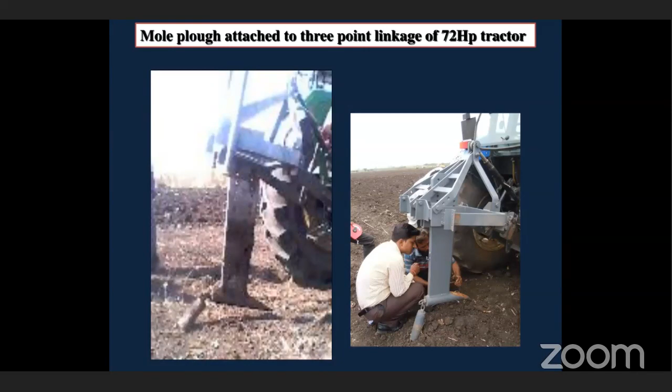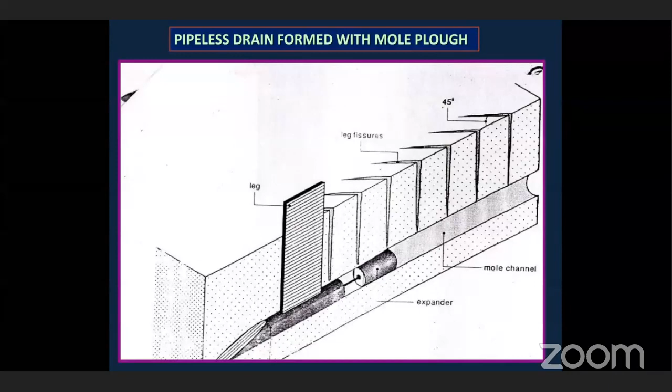Okay, this is the moling operation. Just see the pipeless holes. Due to high clay content, we get very good, smooth pipeless holes due to the mole drainage system. This is the moling operation, when we pull this mole plough through the soil at a depth of 60 centimeters, and we get a pipeless hole behind that mole plough. Yeah, these are the pipeless holes.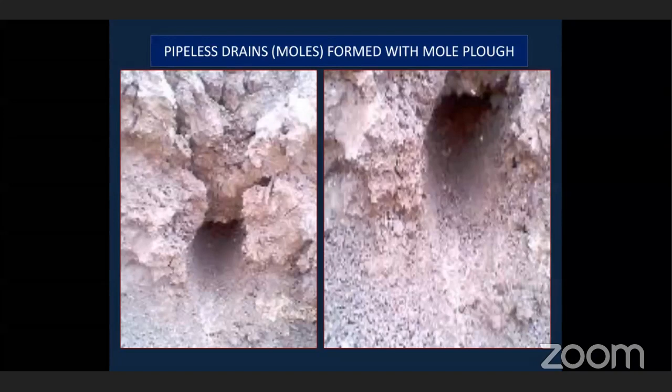That I have observed at my site, as the clay content of my site is more than 50%. This is the process of moling. Below that, two moles were shown in cross section, and then a vertical slot is shown. After formation of the mole, just after one week, the whole soil area is cracked, and through that crack, it will help for easy plowing also.

Farmers reported that after the moling operation, the plowing operation draft required is also reduced. It will be easy to plow that field because moisture is totally evaporated, cracks were formed, and that helps in easy plowing. Due to optimum moisture removal, we cannot get bigger clods with smooth edges, isn't it?

In our areas, when plowing operations were carried out, different bigger clods will come with smooth surfaces, and that will create a temporary impervious layer at one feet depth, which we are cracking with the help of that mole plow. These are the water draining through that mole drainage system. See, the clear water is draining.

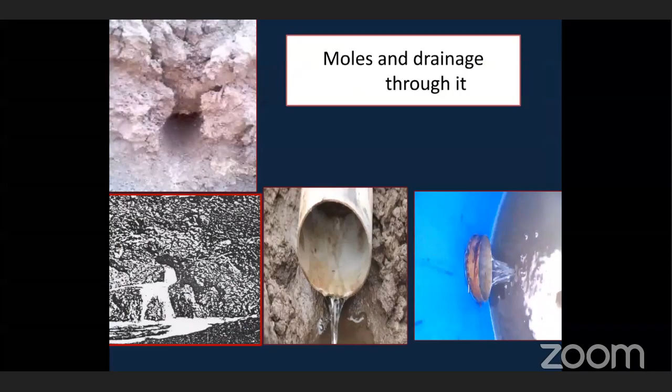I have studied the drainage coefficient, this is a very important part. In 2 meter spacing, why did I not record good results? Because under irrigated condition, the drain discharge observed under 2 meter mole spacing was 20.3 mm per day. This is a very high drainage coefficient, and within 20 hours, with a 2 meter mole spacing, we drain this excess water.

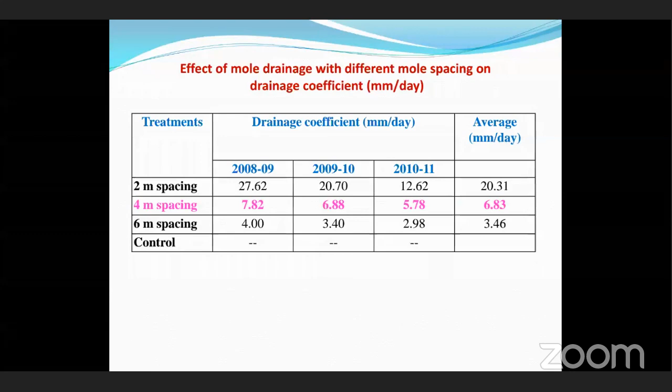But with 4 meter mole spacing, this requires 24 to 36 hours. And with 6 meter mole drain spacing, we required 3 to 4 days of drain-out period for draining the excess water.

I will not explain the other parameters, this yield is our very important parameter. If yield is higher, then all will be higher.

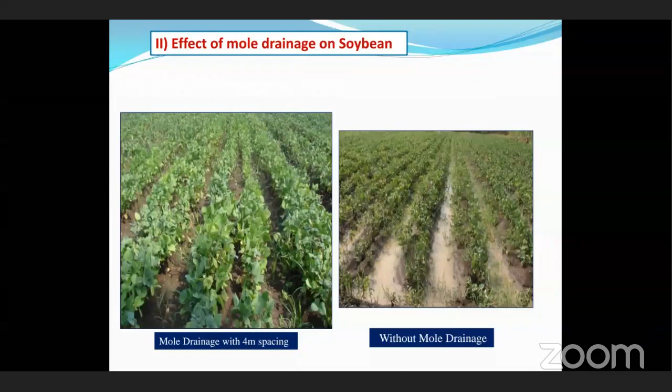See the second crop, effect of mole drainage on soybean. See the crop with mole drainage and without mole drainage. Without mole drainage, there is water standing on the surface - see the crop condition. With mole drainage at 4 meter spacing, water is draining very fast, and the soil is under field capacity, that's why crop condition is good.

This table is particularly for soybean yield. See the soybean yield under 4 meter mole spacing - the pooled mean is 13.76 quintal per hectare, which is significantly higher than 2 meter as well as control. In control, near about 8 quintal is there, but here 13.76. So we have got an additional yield of near about 5.5 quintal per hectare by using this mole technology.

The cost of mole is only 4,000 per hectare, but we are getting 5.5 quintal per hectare additional yield, and in terms of money, just from one crop we are getting this much yield. But throughout the year, groundnut crop is there, chickpea is there, soybean is there, so the yearly net benefit will be higher.

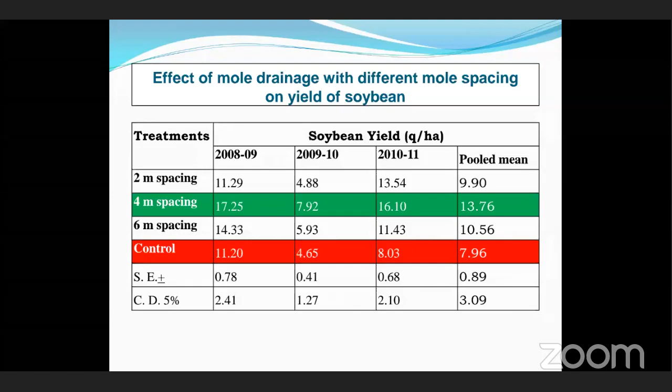Yeah, these are the yield and growth parameters, I will not explain this because time is short now, time is near about up. So this is the third crop, chickpea.

See the 4 meter mole drainage with 4 meter spacing has provided very good congenial condition to grow the chickpea crop, because here flowering is there, but in control part there is crop coverage but there are no flowers even.

I will show the next slide. See, this is the clear-cut visual difference between without mold and with mole drainage system. With mole drainage system, look the crop coverage, the crop is at flowering stage. And see without drainage, salinity was there on soil surface, and crop wilting was there due to excess use of water, and the crop shows stunted growth, even no flowering.

So this is the very good impact of the mole drainage system, especially in a vertisol soil, medium to deep black clay soil having clay content more than 30 to 40%.

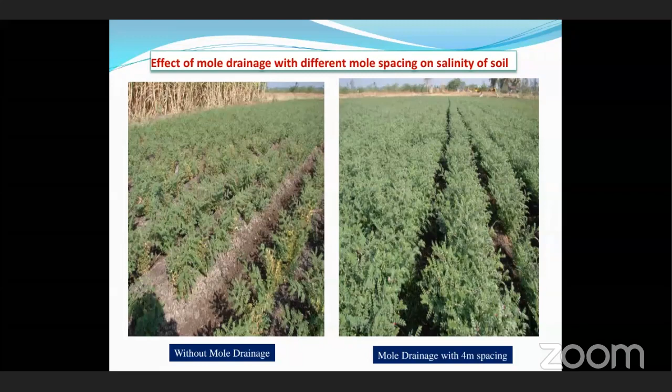This is the impact of mole drainage on yield of chickpea. In control, 9 quintal per hectare was there, but in 4 meter drain spacing, 18 quintal, doubled. It doubled the yield. How? This is due to mole drainage technology, because chickpea is very sensitive to excess water application, and mole drainage has removed that excess water within the safe period, and that's why we recorded the bumper yield in 4 meter mole drain spacing, 18 quintal versus 9 quintal in control. So more than double the yield.

Now this is the last table: economic feasibility of mole drainage in deep black soils for different crops. I have grown soybean, chickpea, and groundnut in 3 seasons continuously for 3 years, from 2008-9 to 2010-11, and I found that by investing 4,000 rupees per hectare and growing 3 crops, by getting additional yields, the additional net benefit over control was recorded highest under 4 meter mole drain spacing - near about 95,000, 94,805 additional net income we got from the 4 meter mole drain spacing area.

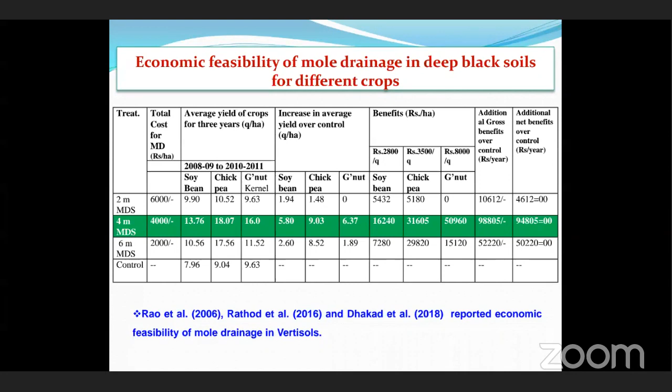Rao et al., Rathod et al., and Dhakad et al. also reported economic feasibility of mole drainage in Vertisols. And through these studies, we have made these recommendations.

These are the important conclusions and recommendations for the farming community. Our research station is working on that particular aspect, and we have recommended different technologies for farmers, and this is one of them. The tractor-operated Phule mole plow developed by Mahatma Phule Krishi Vidyapeeth is recommended for drainage of excess water from ill-drained deep black soil. And the second recommendation was the mole drainage system with 4 meter mole spacing and 60 centimeter depth is recommended for obtaining higher crop yield from ill-drained deep black soil.

This is important because if you want to install the drainage system in deep black soil, we need high cost, and that is not affordable to small and medium farmers. Those who have economic problems can use this mole plow technology, because within 1 year we are getting 94,000 net additional yield by investing just 4,000.

In our site, this mole drainage system worked for 3 years very well. And if our system is installed at the right time, at right moisture content, and in the right soil, then it will work even up to 10 years also. At CIAE Bhopal, the system is working from the last 10 years. So don't take this technology lightly.

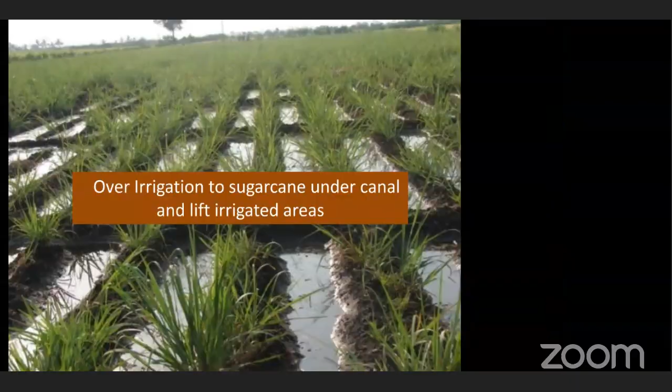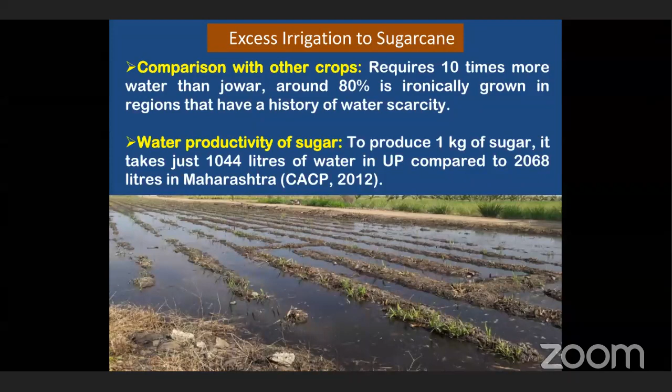After recommending this technology, we have transferred these technologies on 200 acres of area in Sangli district on farmers' fields, and I have recorded the yields also. Sugarcane is an important cash crop, and farmers of this region are always over-irrigating the crop, and soils are facing waterlogging conditions. Due to that, sugarcane productivity in highly waterlogged soil is near about 50 ton per hectare, and they really need the drainage system, the low cost drainage system, and we have worked on that. We installed this system on 200 acres area and got very good results in 2016, 17, 18, 19, 20.

200 acres area covered in Sangli district, again 200 acres covered in Satara district, and again 200 acres in Kolhapur district, through the RKVY fund. RKVY is really helping very well for conducting this low cost mole drainage technology.

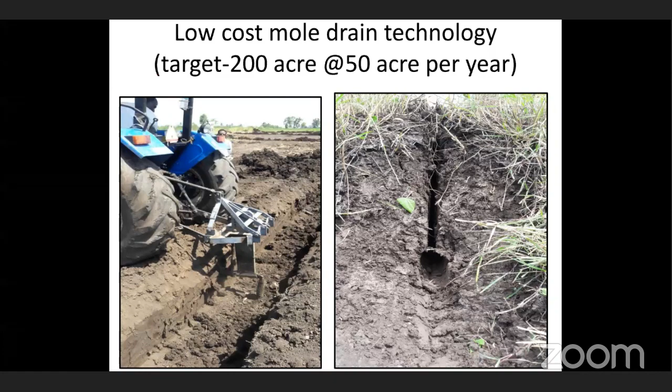Now coming to the photographs, let's see quickly how the moling was carried out. I have shown the pipeless hole; these are in the second slide.

Due to the vertical leg slot, even sun rays can reach up to that moling depth. We know that 60 centimeters depth of soil is very important for root growth, crop growth, nutrient absorption, and water absorption. Most crops have root growth up to 60 centimeters, with more than 80% of roots within that depth, and we are reclaiming that depth from waterlogging through mole plow technology. That's why the impact of this mole plow technology on sugarcane yield is also very good.

Today I want to give one example. A farmer irrigated his sugarcane crop, and the next day at the same time he reached his farm and no water was there, because this system requires only 24 hours to drain the excess water. This means we are getting congenial atmosphere for crop growth within 24 hours. This creates field capacity conditions very quickly for the sugarcane crop, and that's why we get very good yield after mole drainage.

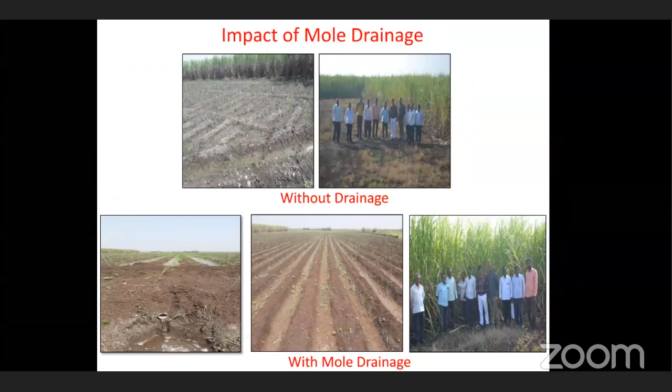Our director of extension is always willing and happy to meet and interact with farmers, asking how this system is working, whether they are benefiting or just wasting money. Farmers have given very good feedback, as they got good yield with the subsurface drainage as well as the mole drainage system.

Our ex-director of extension, Dr. Kokate, has also visited those plots, and he is also happy with the impact of this drainage system.

We took care to select both farmers getting low yield and farmers getting high yield under the mole drainage system, and we have seen the results.

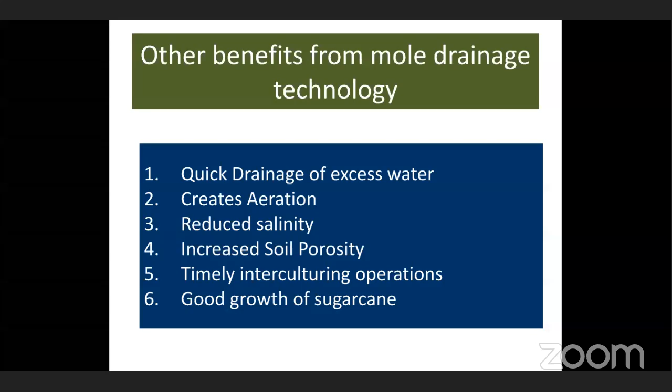We made a questionnaire and asked farmers about the benefits of this mole drainage technology, and they reported these benefits.